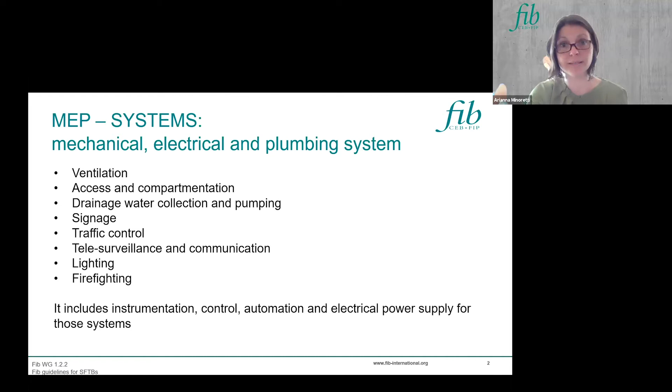Regarding traffic management and closed circuit television, also known as surveillance cameras, these are part of the MEP system. The SFTBs require a traffic management system and surveillance cameras as any other tunnel, for example, to avoid too many vehicles in the SFTB, because accumulation of traffic will increase congestion in case of an evacuation. Surveillance cameras must be located also along the safety path in the main structure and in the connections, in areas that are not in use during normal operation.

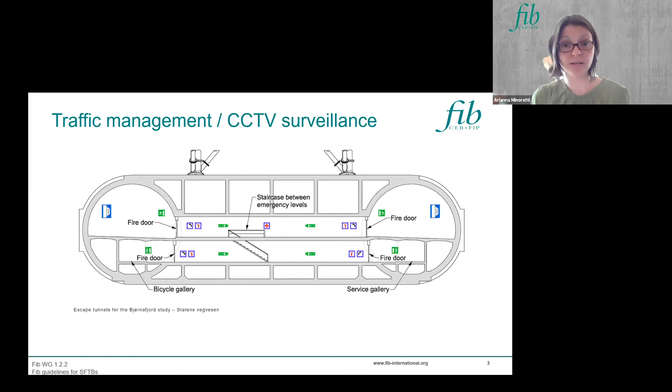In the picture, you see a scheme for the escape tunnels in the transversal connection for the twin tube bridge. In addition, traffic signs along the crossing will help drivers, for example, to keep velocity under control and to keep safety distances.

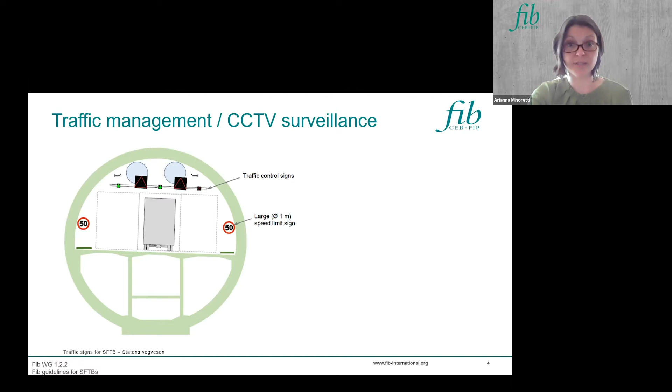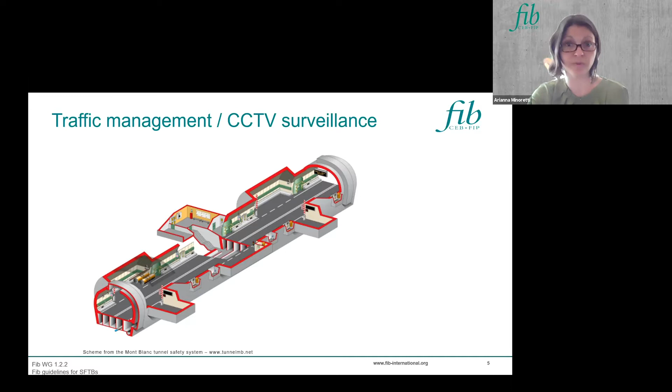Experience also shows that several cases of explosions were generated by fires that were already present on commercial vehicles. This is, of course, a very important topic for the SFTB, where we must take into consideration the confinement effect for a blasting load as in any other type of tunnel, but also the requirement of integrity of the structure exposed to this type of load.

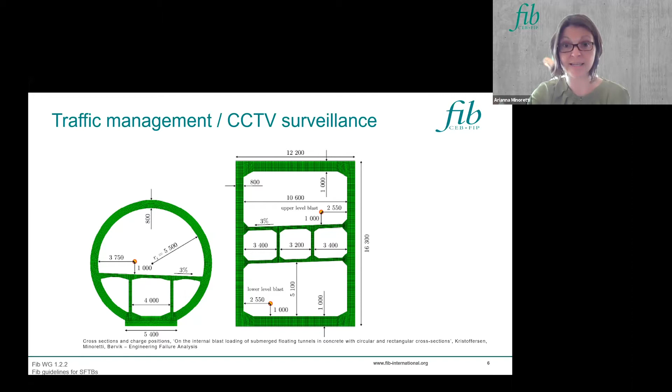This is also why a consistent effort has been made in tests and simulations for this specific load. In the picture, different cross sections are shown with the position of the charge, and these simulations have been published together with other fire and explosion tests in scientific journals, so it is available for everyone.

Air quality and ventilation: ventilation systems are used to avoid high concentrations of toxic gas generated by fossil fuel car engines. The required fresh air volumes depend on the traffic density and the tunnel length.

Mechanical longitudinal ventilation is often used, and as for immersed tunnels, the possibility to use intermediate ventilation towers is limited, so ventilation systems that do not require intermediate ventilation shafts and towers are preferred. But in the design phase, we have to consider that these might require additional longitudinal air channels.

The growing market of electric cars could help reduce the requirements for ordinary ventilation, but we have to consider that mechanical ventilation is also used to create safe zones in the event of fire.

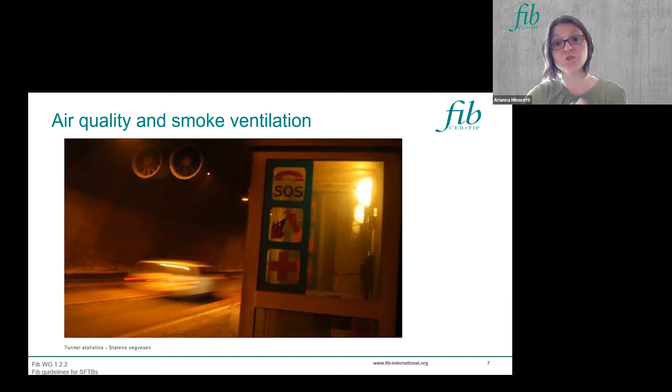Conventional longitudinal ventilation in the event of fire operates at high speed, and the direction shall be in the traffic direction, coordinated with the evacuation plan. Additional horizontal exhaust shafts could also help with smoke ventilation.

Regarding fires, even if passive fire protection is provided, automated fire extinguishing needs to be installed as well. Fire extinguishing water must not accumulate in the tube; it shall be drained and pumped away simultaneously with the fire water supply.

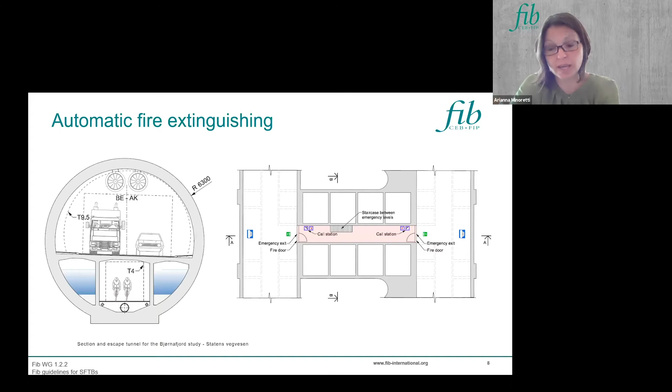Speaking about drainage and pump systems, the SFTB is similar to a subsea tunnel. Usually the tube is submerged and the access points at both ends are above ground, so pumping will be necessary to ensure drainage of the SFTB, and the longitudinal slope of the structure must be taken into account for the design of the system. For a mainly horizontal tube, the water will not move over large distances, and this must be taken into account.

The system shall be over-designed and shall be inspectable and easy to clean, to remove sediments and clogging. The materials shall be saline water resistant.

Fire extinguishing water reserve tanks shall be included in the design, and the relocation of the associated weight shall be included in the design scenarios.

If an automated bilge pumping system is part of an inherently safe design, it shall be equipped with a separate, independent power supply and an offline control system. It shall be subjected to periodic inspections, test runs, and a certification program. Pump engines and control systems shall be located where the risk of flooding is lowest.

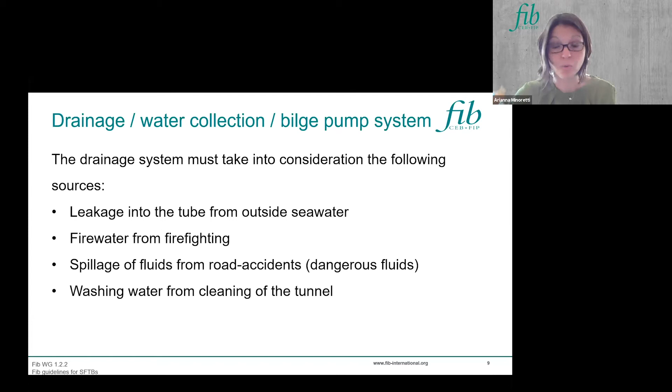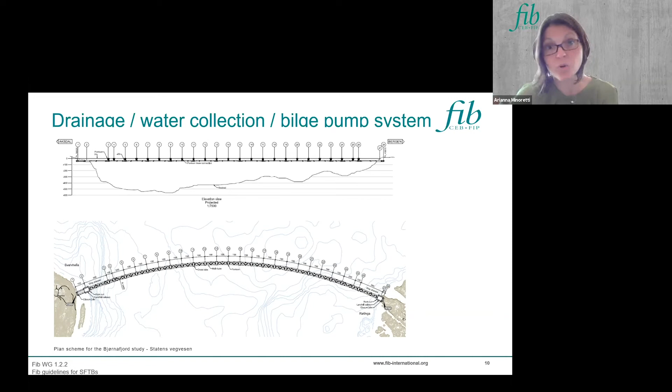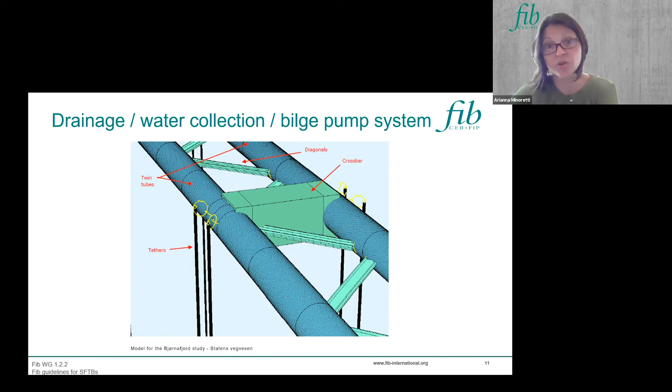Of course, several considerations must be done. For example, to reduce the required pumping energy, it is recommended that the drainage water is pumped in series from the middle of the SFTB and to each end. It is foreseen that each pumping station has 2 pumps with the rated capacity, and there will be pump lines in each tube tunnel, for redundancy.

The pumps can be submerged pumps placed in the reservoir or dry pumps placed on the outside. External pumps will be easier to maintain if a suitable location is available. The pumps will be monitored and controlled remotely, as control and monitoring of valves will be from remote control rooms.

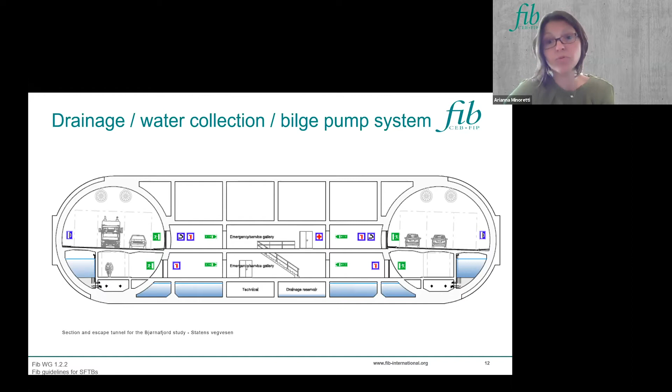For measuring level indication, ballast tanks require particular attention. The system must be designed not only for the operation of the structure, but also for the temporary phases. The design of the ballast is done from the early phase in the design procedure and must take into consideration several aspects connected with the design choices for the structure, like the amount of solid versus water ballast, or having a passive or active ballast system, which implies different setups and installed systems.

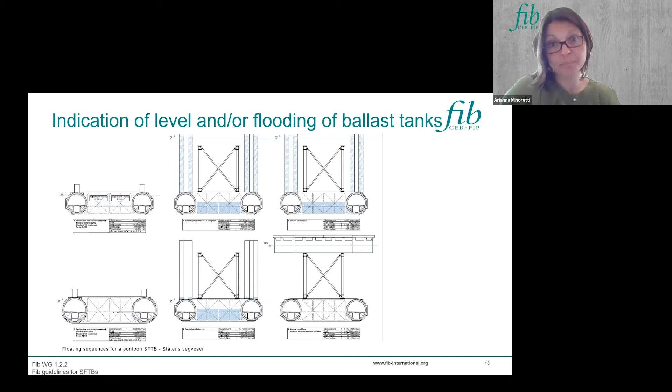So several choices must be done, for example, regarding the possibility of doing the ballast operations remote controlled or just manually, regarding the possibility to have permanent connections between ballast tanks and pumps, manual valves or remote control, and so on. Every choice implies different systems to be provided, and it is suggested, as we will see in the next presentation, to make choices that limit the amount of inspection and maintenance of ballast equipment, and also minimize the risk of maloperation of the ballast system.

For safety purposes, it is suggested not to have direct connection to the sea after the installation. Lastly, I can say that usually compartments used for permanent and temporary ballast tanks are not intended to be filled 100%, and control sensors have to be installed.

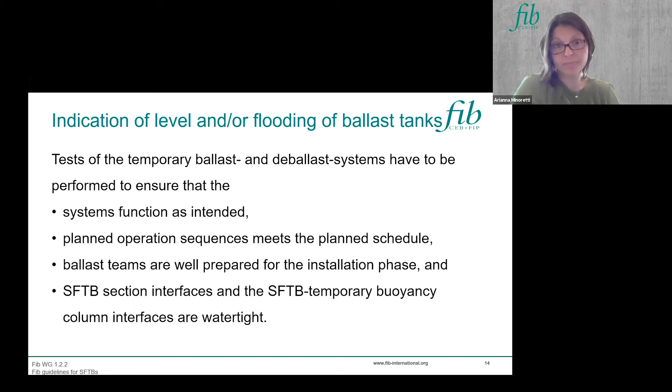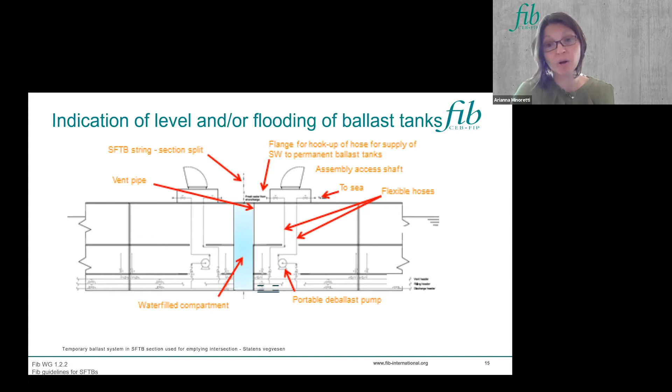For the studies done in Norway, for example, the possibility of using portable pumps connected to the system, adjusted during use, has been evaluated for several operations as a safer solution, also in terms of reducing the possibilities of maloperations in the long term.

As it is necessary to check the freeboard for safety purposes, it is also necessary to include permanent force and displacement measurement systems. This system is also a cost that must be taken into consideration during the feasibility study of the crossing. This means that in the design optimization procedure, it is more convenient to enlarge the single tether than to design a bridge with a higher number of tethers.

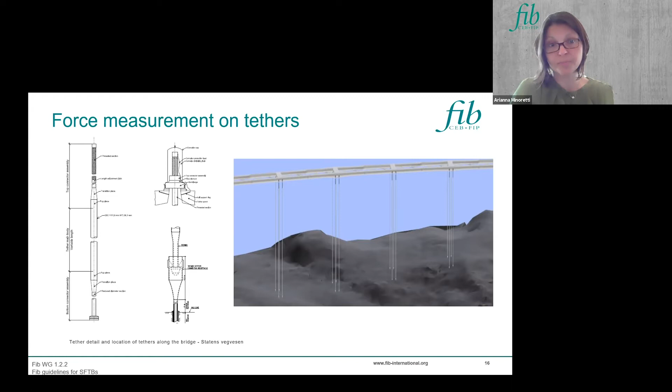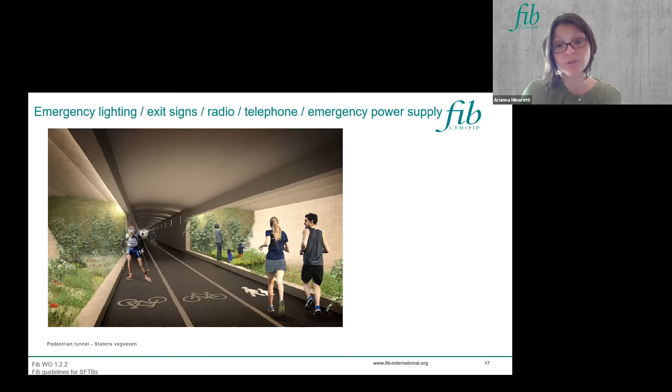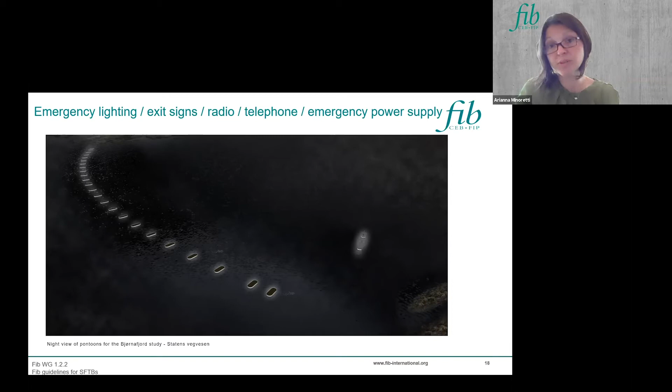As another example, a night lighting system could be evaluated for a pontoon SFTB for safety purposes. Lighting the pontoons could be an additional way to locate their position for passing vessels, but ship collisions are not the only possible collisions that must be considered. Submarine collisions could also be an issue. If a sonar reflector system is installed on the structure for detection by floating or submerged vessels which could collide with the structure, a passive system is recommended instead of an active one, due to the proven negative effect that the active system has on marine mammals.

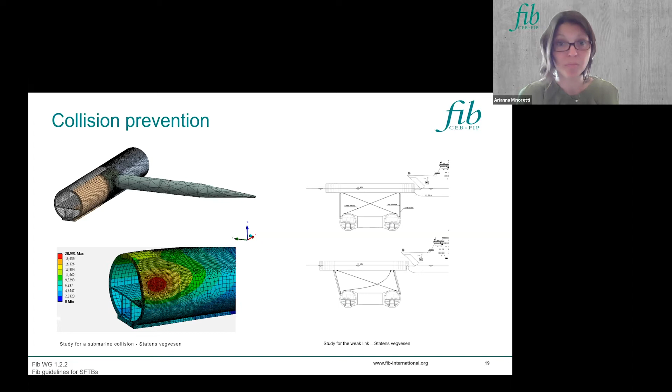So this was an overview of the content of chapter 10 on the MEP system for Submerged Floating Tube Bridge. Now we go on with chapter 11.

That is the chapter on operation and maintenance. As we have seen in many of the previous chapters, in more or less all the choices done during the design of the structure, we have to already take into account the operation and maintenance procedures. This must be done to design a structure with the principle of minimum maintenance. This is not only a matter of cost connected to the maintenance procedure. Minimum maintenance means a safer structure, because it obliges the designers to work on the robustness of the concept and to make choices that will guarantee the durability.

This implies a lower use of new materials during the life of the structure, with a consequent reduction not only in maintenance costs, but also in new emissions in the environment. Of course, this requires an effort in the design stage, where we will have to think about the life of the structure and make choices that will allow us to inspect every part of the structure, directly or with a measurement system, foresee the challenges that the structure will have to face during its life, and protect the structure consequently, or prevent dangerous situations, or choose a strategy for the maintenance of the structure, evaluating performances and cost.

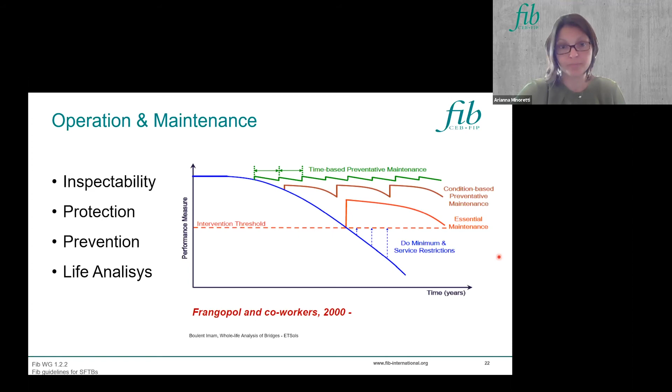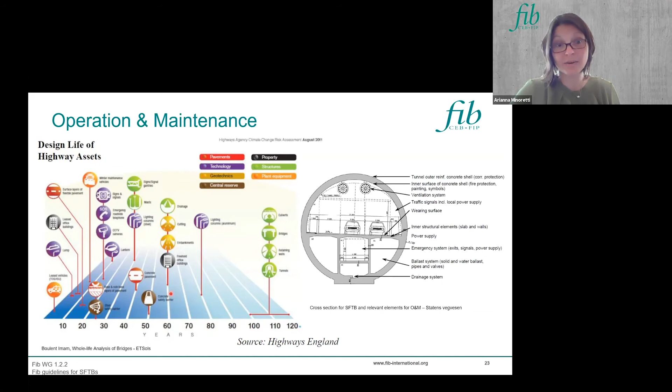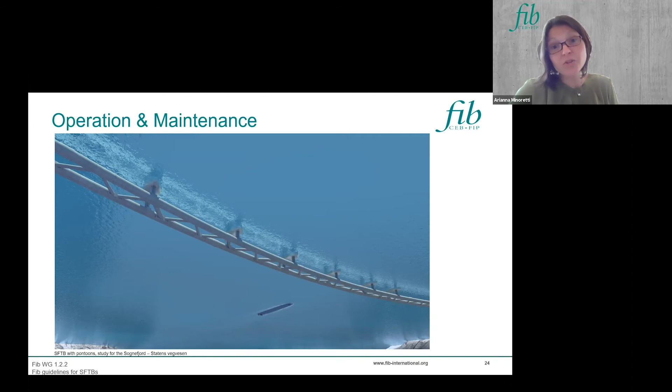The shape of the cross section is very important, because while maintenance on structural elements outside the tunnel can be performed without interruption of traffic, continuous planned maintenance can be performed with a minimum of one tube open for two-way traffic. For this reason, a twin tube configuration or a similar one is recommended.

For example, during standard operation, there must be sufficient space for two lanes and a service lane. The service lane can be used for standing vehicles in case of vehicle breakdown, or for the passage of emergency vehicles in case of a traffic jam. Or, in case of minor maintenance activities that require access to technical rooms or any point along the road for picking up objects, it is better if traffic can continue in two lanes at normal speed and a service vehicle can park on the third lane.

While in case of most maintenance activity, two adjacent lanes could be blocked and traffic could continue at reduced speed in the third lane. Blocking two adjacent lanes allows safe and efficient maintenance work, while blocking of one lane for maintenance is considered too dangerous, because this does not provide sufficient protection of workers.

Again, if one tube is blocked due to major maintenance, for example after a traffic accident or for cleaning of the entire cross section, two-way traffic can be set up in the other tube, and a third lane may serve as an emergency lane.

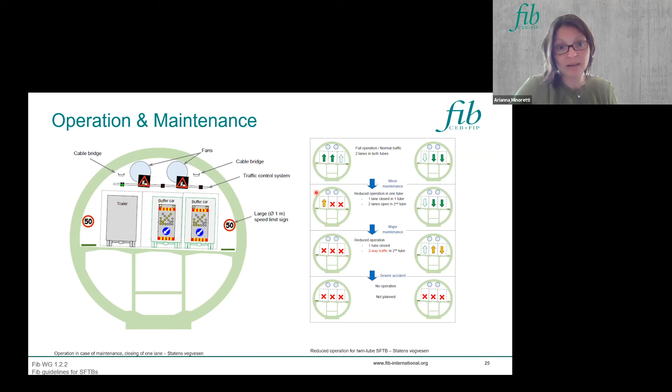The choice of material. Concrete is a preferred material compared to structural steel, for the durability shown in offshore applications, in particular for elements in splash zones and where the use of cathodic protection has no effect.

Of course, not all parts of the structure can be realized in concrete. In the case of tethers, for example, replaceable sacrificial anodes must be provided. If sufficient design life cannot be achieved with great confidence, the replacement of tethers and the connectors has to be planned already in the design, obviously considering also the related cost.

For concrete, suggestions for proper mix design are known in the application field, and new solutions are under development every day. This should be considered in order to guarantee a durable structure and the longest possible operative life for the bridge.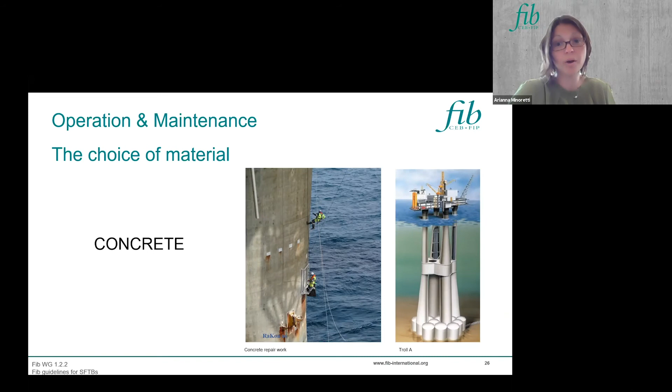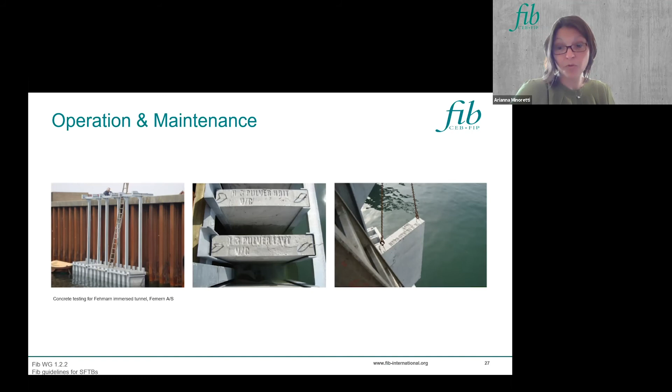The choices in the design phase are influencing very much the operation and maintenance procedures from the early design stages. As we have already seen in the previous chapter, the design of the ballast system is a key phase, not only for the definition of the structural behavior, but also to define the necessary operations during the life of the structure.

For example, for the Norwegian designs, components which require relatively intense maintenance, such as pumps, are not installed permanently in peripheral locations, but stored in an operation center with easy access.

In addition, the structure is designed with a passive ballast system, meant to remain constant during the life of the structure, with the possibility to modify the relocatable part of the ballast, that is water ballast, only in case of specific situations, like for example seawater level rising, that are considered in the design.

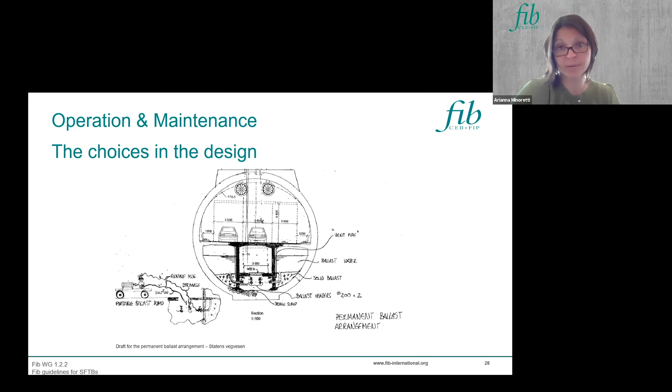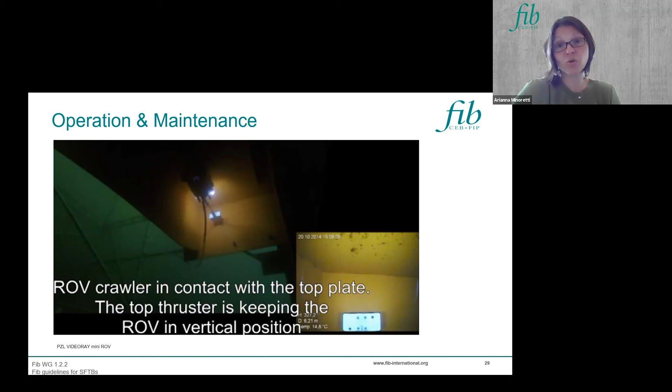The influence of the design on the operation and maintenance procedure is obviously very important also for the executive design. As an example, inaccessible corners must be avoided in the design of the top anchorages of tethers, which are also critical elements for the structure, considering the necessary access with remotely operated underwater vehicles (ROVs), shown in the picture, for inspection or repair during the life of the structure.

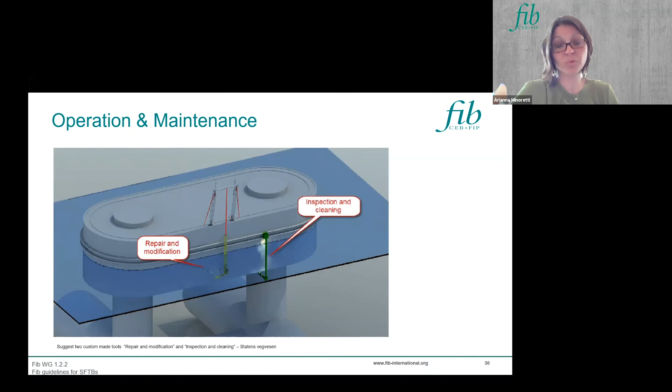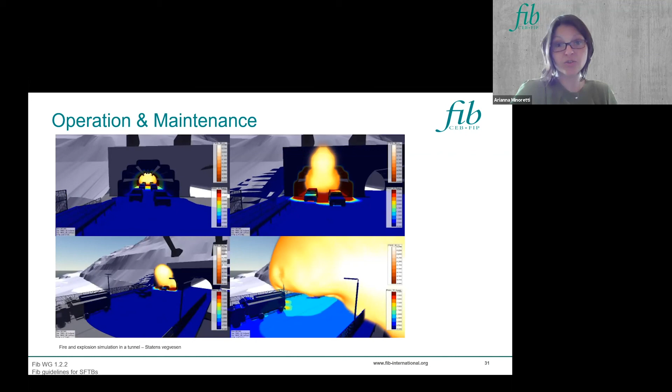Of course, many design choices also directly influence the durability and maintenance of the structure. This is the case of the design of the fire protection on the inner surface of the concrete shell. To define the fire protection, the local rules must be considered regarding the load to apply. In addition, systems for thermographic control can reduce the risk of the event. The picture shows a simulation for fire and explosion in a tunnel.

Monitoring is a valuable tool to verify safety and performance of the structure and to gain knowledge on complex phenomena. Precise knowledge of the condition of the structure enables optimization of maintenance work, and these benefits justify the cost for the installation and maintenance of monitoring devices.

Monitoring can be used for various purposes: to monitor safety as part of an emergency system, such as measuring deformation, leakage, air quality, or temperature; or to verify structural behavior assumed in design, for verification of design assumptions and better knowledge of complex phenomena like strain, deformation, settlements, natural frequency, wave pressure, wave height, currents, and so on; or to monitor deterioration processes for planning appropriate maintenance, such as measuring electrochemical potential of steel, relative humidity in concrete, and so on.

If the results of monitoring are critical for triggering alarm systems, redundancy of different sensors and systems can be used for maximum reliability.

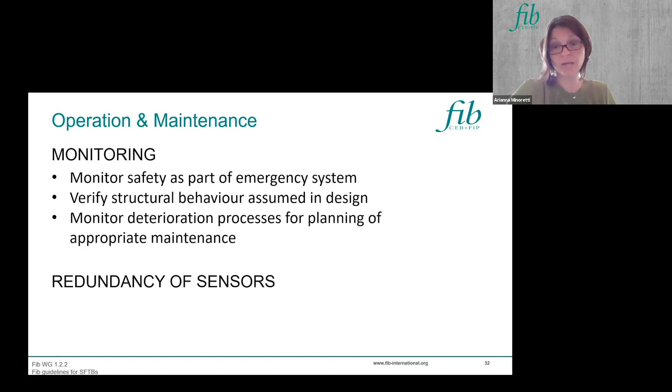Finally, the availability of the structure is a necessary concept to consider when all the choices are made, from the design stage and when the operations are planned. It is preferable to plan sufficient preventive maintenance, like inspections of the ventilation system, traffic control system, drainage system, power supply, and so on, in order to avoid unforeseen restrictions as much as possible.

In our experience, the acceptance of road users for restrictions is higher in case of early announcement and explanation of the benefits of preventive maintenance. So as always, do not underestimate the power of communication.